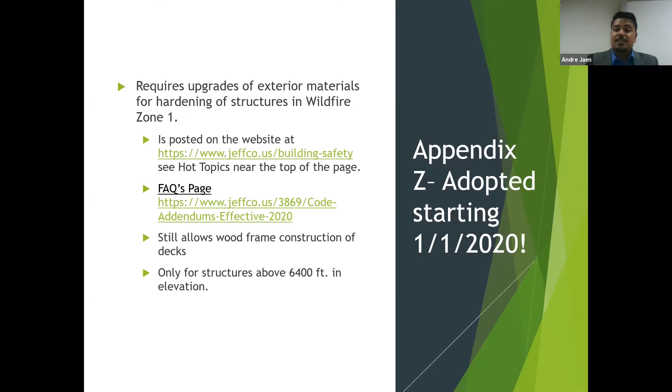The biggest question about this is the applicability zone, and it starts at 6,400 feet in elevation. The best idea, if you're working here in the city, is if it's west of C470, it's worth giving us a call. That's a good dividing line for a lot of the county there.

We also have a map posted on our GIS software specific to this, so you can see the wildfire zones. Basically that contour line is a good indication that you're going to hit that 6,400 mark, which triggers these requirements to meet the Appendix Z standard.

This includes all buildings, all construction, including moved buildings, which is probably one of the trickiest things here. Bringing something into that section of the county, or a modular home, those might be a little more scrutinized as we move forward—this is brand new to us too. If you have specific questions about that, I'd be really interested to hear what you've run into.

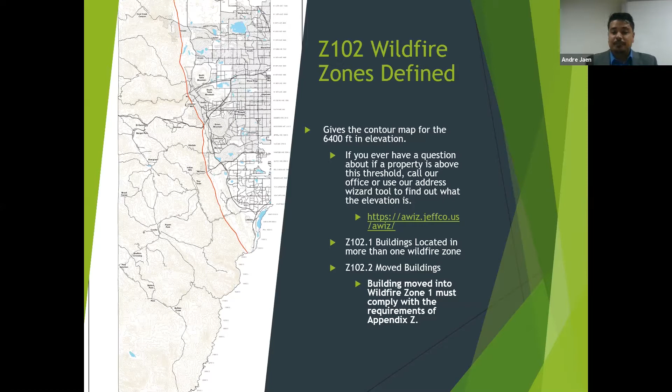So what does it all mean? Well, it means everything. Residential and commercial, that's what we're talking about. We're talking about move and sets. And probably the most common question that we get from home builders and from homeowners is, can I still build a deck with wood?

And the answer to that, we worked really hard to make sure is a yes.

We worked in writing this with a few different places. Our fire district was the folks that started this off.

All of our mountain fire districts are seeing increases in terms of population density up in the foothills. They're seeing more and more foam plastics and composite materials that concern them. And obviously, because of climate change, they're seeing a much longer fire season. So that's what's really sparking their initiative to come to the building departments and say, what do we have to do in order to make this better?

From there, we also had some discussions with Boulder County, who has historically been doing WUI-based codes for some time, to see kind of what's available in the market, how their builders reacted to it. Because for us, we didn't want to put our local builders in a position where they required materials that weren't readily available or did the kind of things that would increase costs so dramatically that they would not really have a chance to make a buck.

Because at the end of the day, if they can't make a buck building a house, then they don't build a house. And that's way more important.

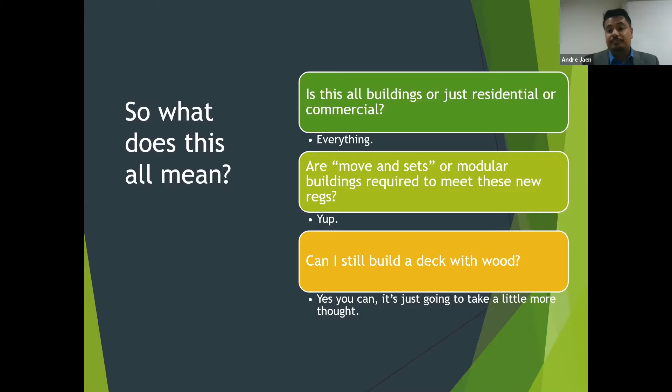So if you crack into this code, what you're going to end up seeing is a couple of different sections based on fire resistance rated construction, which we're all really familiar with out of our building codes, but then also non-combustibility. The important thing to think about here, from a top-down perspective, is that the building code does a great job in isolating fires in compartments. We know how to separate hot gases from other fire compartments or fire separation areas. This is thinking about it from the outside in, and so that works a little bit differently.

So in terms of isolating what materials you're allowed to use for things like exterior cladding, we talk about fire resistance rated construction in terms of assembly, right? That's the entire wall section. That's the sheathing, whatever you might use as a substrate if you need to upgrade depending on what sort of siding or soffitting you're using. There's a litany of different materials that you can use, but the important thing when submitting your documents or having this conversation is that we're going to talk to you in terms of system. How does this make that 1 hour fire rating? And from the fire side being on the exterior, how do we think about that?

Integrity throughout the assembly is obviously the biggest concern, making sure windows, doors, all of that meets that same criteria. But ultimately, this is something that most builders are really familiar with, and they're excellent at being able to move these kind of questions forward with their design professionals and team up together in order to move forward.

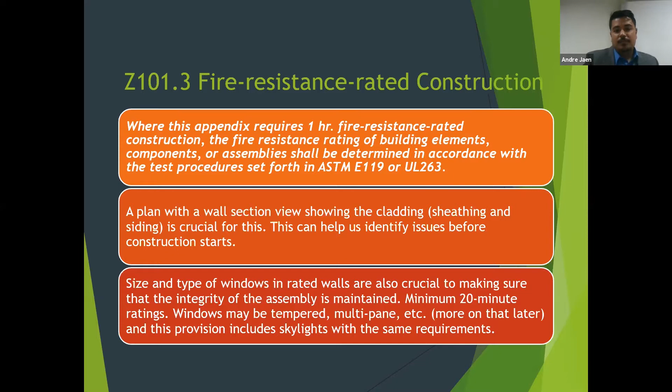Non-combustibility, obviously everyone's familiar with, but what does that mean from the outside? Well, it means that materials like metal, while they won't burn, they transduce heat very well. And when we think about fires, when we think about wildfires, we have to consider what that's going to do to those internal materials. Oftentimes it's required adding things like substrates.

So on a metal roof, you would add DensDeck or attach it to a non-combustible framing member in order to meet these sorts of criteria. Ultimately, though, as you think about moving forward with other attachments, you want to keep that in mind. How do these things differ from each other?

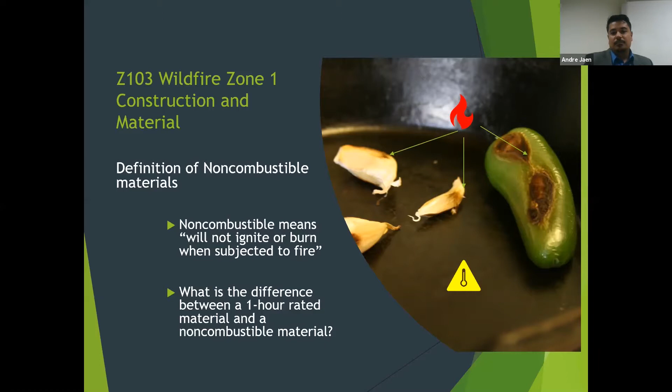So in ignition resistant building materials, we require that whatever materials we're talking about typically meets the ASTM E84 test. That's the extended burn time test right there. You'll see on there that there's also a mention about weatherability.

This has brought up some concerns from builders about things like, what about spray on intumescence? Or what about spray on fire resistant materials? How do we stand with those? Typically, the biggest concern with that is maintenance and weathering. A lot of those materials used on the exterior get a little cloudy about how we're going to make sure that those are protected consistently.

So in taking a look at what materials you're going to use, obviously feel free to give us a call. We'll get you in touch with the plans examiner that will go through your material list line by line. But in terms of shopping, you're looking for that ASTM E84 test, which is going to be abundantly labeled there. So anything at the job site, that's what your inspector is going to be looking for, and any discussions on what materials you're allowed to use, that's a typical thing that's going to come up.

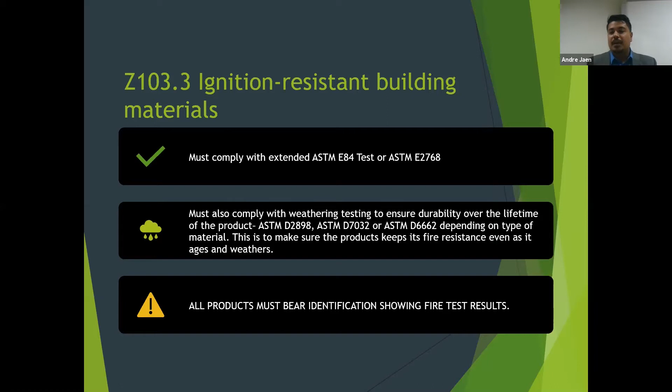So if you're unfamiliar with those two tests, it'd be worth a look as to just kind of how they apply and what things you'd be looking for with them.

So moving through the building, we'll start at the roof. We've been doing Class A roof ratings up there for years, so this is nothing new. Typically that's something the homeowner will take on themselves, or it'll be a really simple, streamlined permit. Class A roof assemblies have been required in Jeffco for a long time. Typically the stuff we have to worry about is your flat roof materials and metal roofing systems, but that's really nothing new.

Now, in terms of addressing the continuity of that, for asphalt roof shingles, we've allowed for cut close valleys, California valleys, a woven valley, or a W metal valley with 90-pound felt underneath. Any of those are valid options for your roofing assembly, and we see them as just as continuous in terms of coverage for the full Class A.

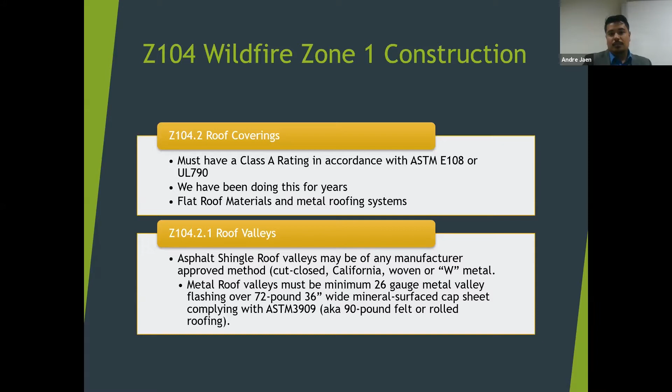Now, as you move through your exterior walls, this is typically where we start to get tricky. When we talk about the exterior wall, we're talking about that 1 hour fire resistant rated construction. We've seen assemblies now where we've maybe had wood shiplap with 5/8 type X behind it - things that have been considered opening protectives that we would typically do on a 1 hour wall, and we're just using that to help meet this criteria.

What that means in terms of your fire district, though - when we invited them to a few of our contractor meetings to discuss this with the builders - is that they don't know there is gypsum board behind that wood siding. And sometimes that's going to mean they have concerns about trying to set a fire line there because they don't know whether or not that house is defensible.

So while this is a discussion you obviously have to have with us because we have this code, I strongly encourage every builder to get in touch with your fire districts about their expectations, about their concerns. That hands-on approach will really help guide your project in the right direction, and make sure your homeowner is getting the product they really want.

Your approved non-combustible materials - we run into a lot of hardy board siding. Cementitious siding, cementitious fascia, all those are going to meet this kind of criteria. Heavy timber and log wall siding, that's all going to meet it as well. Fire retardant treated wood, obviously we want to see the ratings for that.

And then our ignition resistant materials, and we're back to that definition from earlier. Remember, those are going to transduce different heat depending on the framing member that they're attaching to. We need to be cognizant of the whole assembly that we're using - we want to make sure that's extending from your sole plate all the way up to the underside of the roof sheathing.

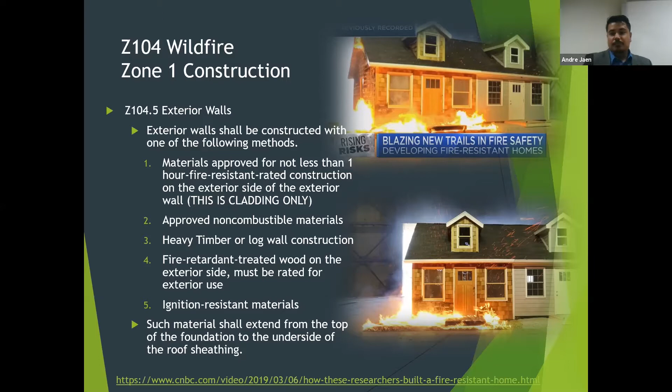So at the eaves, basically we're at the same sort of level of protection as the exterior wall. Now, you can take a look at a few different manuals that are out there. The Colorado State Forest Service has a great Firewise manual you can take a look at, where they show, in terms of wildfire spread, how hot air rises, gets trapped under the eaves, and starts to become a concern as a wildfire progresses.

What we're looking for there is basically the same level of material as your exterior cladding. From that, it's important to note that a lot of materials out there have been evaluated by the California Fire Marshal Service. They have a building material listing service site that is an invaluable resource for this sort of thing.

So if you see some product here that doesn't fit any of these descriptions, that doesn't mean that it's disallowed - it still could be usable. We just need to scrutinize it a little further, take a look at that listing service, see if we have some evidence in order to say, absolutely, we can take this on.

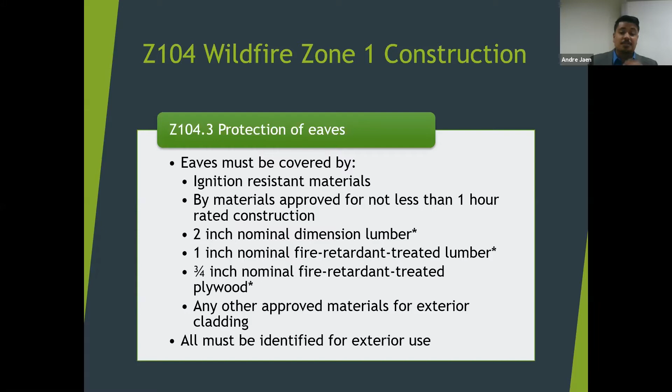So moving on to gutters and downspouts, they do have to be protected now. It was one thing that we had never required previously. Typically, on most inspections we do, we don't see gutters installed. We understand that's just the nature of the business and scheduling people out, and it's only gotten worse since COVID. Getting subs lined up in order has definitely extended timelines. There's no getting around it.

That being said, where we do come out and see gutters provided, we want to see a gutter guard. Other jurisdictions we've seen have requirements for non-combustibility, wanting a metal guard on there. At this point, we have not written that expressly into this code. We want to see a gutter guard installed because that's a step in the right direction for now, but we're making these changes incrementally.

We do realize in trying to write this code, whatever we put in is not going to solve the problem of existing building stock with failing wood siding and wood shake overnight. Those are all still going to be there. So to scrutinize the next house being built so much that it raises the cost of construction enormously, when the neighbor next door isn't taking care of that property and is propagating wildfire spread, that's still kind of hit and miss there.

So just to keep you informed, as of right now, a gutter guard is what's required of you, and certainly have that discussion with the homeowner if they want an upgrade or something like that. But that's where we stand at the moment.

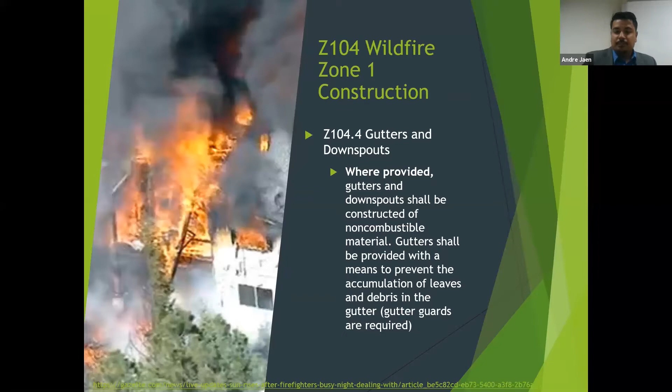Now, decks are probably the biggest question, especially for folks that live out in the hills, because building a deck is just as tantamount as building the house. It's exactly why you want it - the view.

Your deck surface needs to be of a non-combustible material and approved wood thermoplastic composite lumber with an ASTM E84 flame spread no greater than 200. That really does include just about any type of composite decking that we've run into that you can typically find.

During our initial evaluations on how we were going to move forward with this, we brought in some contacts from our HBA. We also spoke to some distributors in town about what they have and whether their stock would meet this. Specifically, Moore's Lumber had a few representatives at our contractors meetings regularly. From what I garnered from them, this really seemed like a non-issue in terms of supply. But as always, definitely scrutinize any materials that you're getting just so you meet this criteria. And if you have any questions about something you're not sure on, feel free to reach out.

Other ignition resistant materials - IPE decking, some other exotic hardwoods - definitely meet that criteria for low enough flame spread that they can just be used without issue. So you do have a lot of options out there.

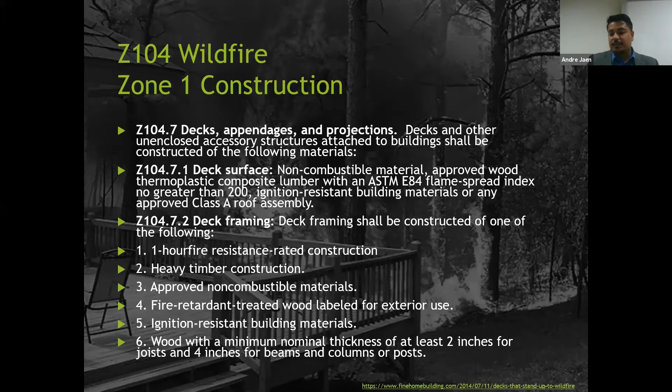Exterior windows and exterior glazing - at this point, conversations about this topic typically include things like metal frame windows. After discussions with our fire districts, they didn't have as much concern there as with the number of panes in the window or getting tempered glass in there. So we allow for multi-pane, we allow for tempered, we allow for decorative glass block. There's very little restriction on this in terms of windows.

The only times we've seen issues with this has been more oriented towards homeowners wanting to use reused materials for smaller projects - things like single pane windows going into an unheated garage that might otherwise be a viable option, but in this case we're not going to allow.

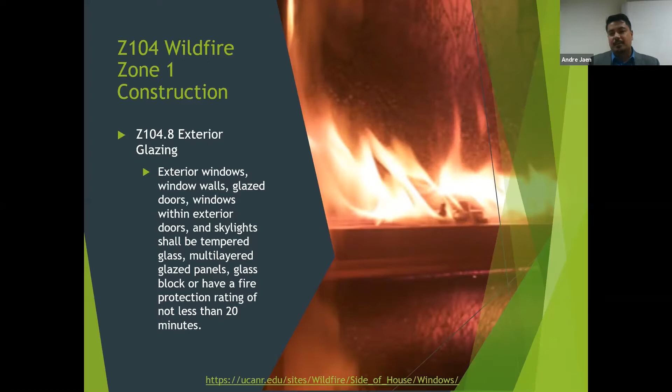Exterior doors - you still have basically the gamut: solid core wood doors, metal clad, 20-minute rated doors, and obviously all glazing in doors has met the criteria for typically tempered glass for just about ever now. It's typically not much of a concern to make sure you're getting a door with that. We really haven't run into a circumstance where we've had to correct this out in the field. Once again, it's typically materials getting reused from other projects and smaller things where this is a concern.

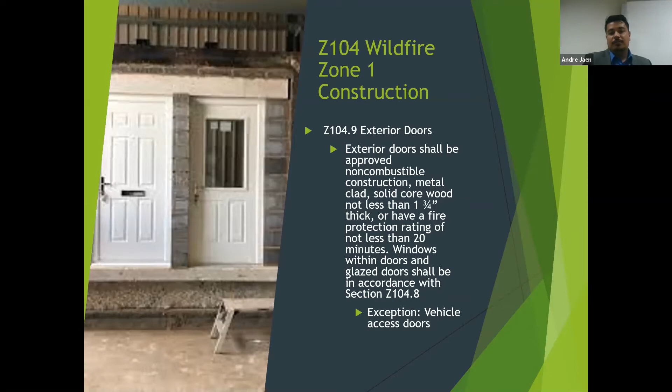Ventilation - the next big question here is how you're going to make sure you're meeting this really important standard for being able to vent that roof while maybe eliminating some soffit venting. Vents located in the fascia, according to data from people with more expertise than I on how wildfires work, shows that by being pushed away from the house and not underneath the soffit, there's less chance of intake from an ember.

We've also had questions about things like, well, what about your ridge vent? Typically those are made out of plastics, very permeable. From our conversations with fire districts, exhaust vents are less of a concern for them overall - that ridge vent isn't likely to intake an ember. Certainly it could be an entrance point, but it's that intake vent lower in the soffit that's going to convect and pull that air in. That's really where you're going to possibly get some intrusion, so that's their biggest concern.

Moving forward with this, we wrote in that you'd have 1/8 inch screening, meaning you can create your vent a few different ways. There's a lot of materials already out there that will meet about an 1/8 inch opening, or you can add screening to them, just realizing you're going to take a small reduction in the air value, the airflow coming from that particular vent.

You can also make your own - we've seen that done by punching some holes through your blocking on an open tail rafter system, then making sure screening is placed on the backside of that blocking so nothing too big in terms of ember size gets in there. We mentioned gable and dormer vents, though it's atypical in terms of construction these days to see that type. Foundation vents should be located as close to grade as possible, just to mitigate the chance of airflow trying to suck embers into an open crawl space or basement.

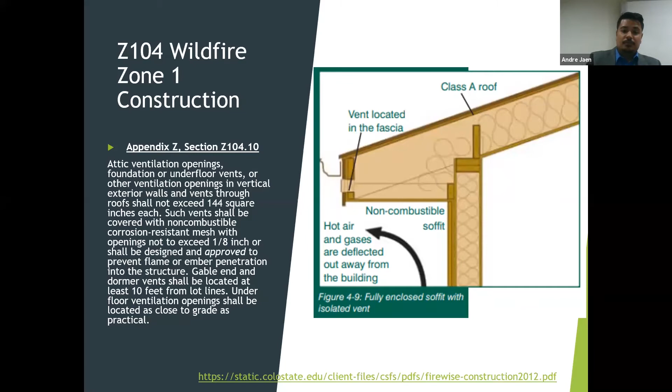Roof replacement - another important point here. Typically for smaller projects, anything that didn't have a Class A rating before, especially, we're going to force the issue of replacing the full roof if you do a 25% repair. Previously what we allowed was anything more than 2 squares would require a building permit, but we would allow any type of roof replacement - so if you only wanted to do 2 slopes on a roof, you could. In this area we're going to try and catch up some of that existing building stock, especially with these old existing cedar shakes.

Those are the kind of kindling that really spread wildfire quickly, so we're going to try and tackle that issue first. So if you go back and want to, say, do a half roof replacement, there's a good chance we might be talking about a full replacement. We do have a list of materials that don't fit this criteria as exceptions - things like concrete and clay tile, simply because of the vast expense that could come from requiring a full replacement due to a repair. We are going to allow you to do partial replacements on those - so we'd issue a permit for, say, a 50% replacement.

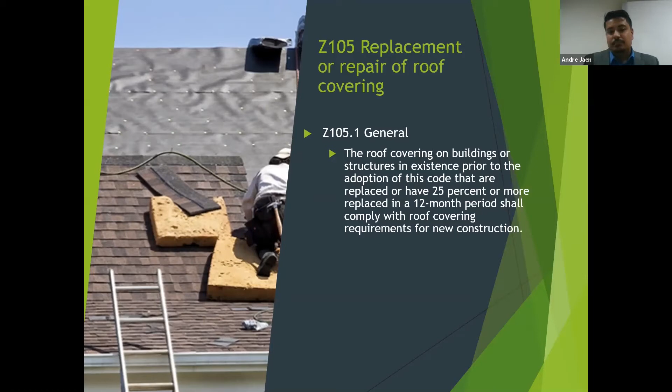Now, right here is Holy Grail when it comes to what we're talking about. It's that CAL FIRE Building Materials Listing Service. I can't stress enough how important it is to spend a little time getting familiarized with how to search the site properly and get what you want out of it.

What will happen is when you select a particular topic, say decking or exterior or under eaves, you'll find a list of materials there that at first glance you'll see mostly the product name, the manufacturer, but that's about it. You won't see specifics on it. If you download the PDF that comes off of that page, though, you will see the installation specifics for how they're going about meeting this rating, so that way you can make sure that you're meeting that criteria.

Some of these things will tell you wood shiplap siding when you first take a look at it. Then as you scrutinize a little further, you'll find that it's only for 5/4, and that material might not be readily available for you. That's the kind of thing that you might want to bring up with your distributor. You also might want to just check to make sure that any materials that you aren't specifically bidding but you know are going to end up on the job are definitely going to still meet this criteria too.

Overall, we see a lot of success once people start using this regularly to their advantage, but it just takes a little time to get used to. It's not too bad of a website, but I can't encourage you enough. Spend some time getting to know it.

And if you see something that either isn't there and you think should be, feel free to give us a call. We're happy to get in touch with some manufacturers. I had a call from LP just this week about some of their products and making sure that we're kind of advertising this on their behalf to say that, hey, there are options to go and figure out whether or not this meets your criteria without calling your sales rep immediately. You got a few different options to look this up for yourself and see if this works.

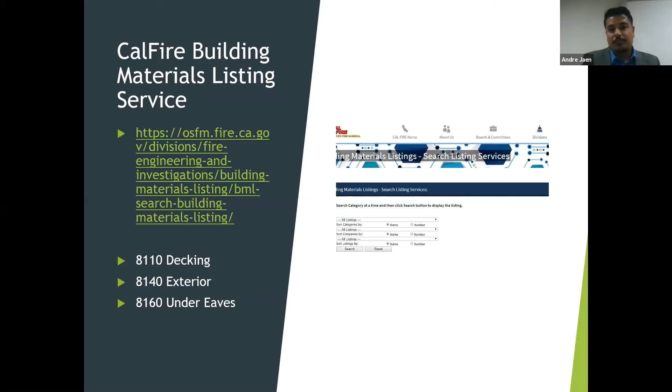So this is an example of one of those reports that you would consider pulling down. If you don't have a report for your material that you'd like to use, then we can still scrutinize it further with you. We'll take a look at the flame spread, the smoke spread, whatever information we can get from some good reputable sources, typically like an ICC-ES report, things like that.

So I can't stress enough that we are cognizant that while this is a major change, a lot of you guys have already been building well above the standard. In scrutinizing some of these products, it's important for us to recognize that there are options and there's room for creativity on how we're going to meet this criteria.

So if there is anything that you have a question about, feel free to give us a call. We'll get in touch with the manufacturer with you. We'll do a conference call. We'll figure out what we can and can't do with it.

So plan review expectation, right? This is kind of one of those big hurdles. If we can save you on the design side and on the bid by making it clear that these things are what's required, then obviously you're advantaged compared to your competition out there.

Please make sure that if you can, just like you would on any other general notes page, take a few minutes to have your design professional come up with a list of exactly these same criteria so we can quickly reference these for you. If we see something that's a red flag immediately, we can tell you. It'll save you redesigning later.

We do have, and I'll flip quickly to this next page, we do have a sort of cheat sheet available here in the office. So if you send a small project down, we can kind of walk you through that same thing, or you can use it as a template.

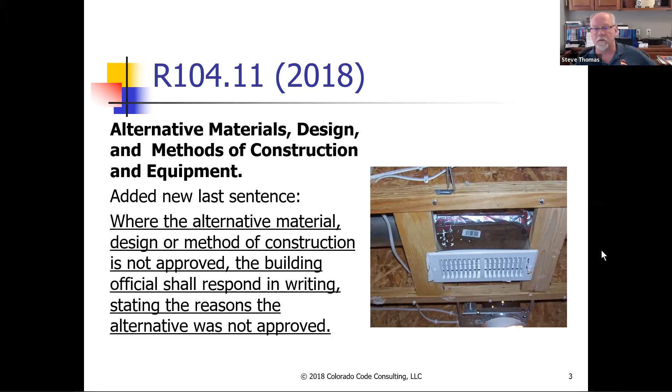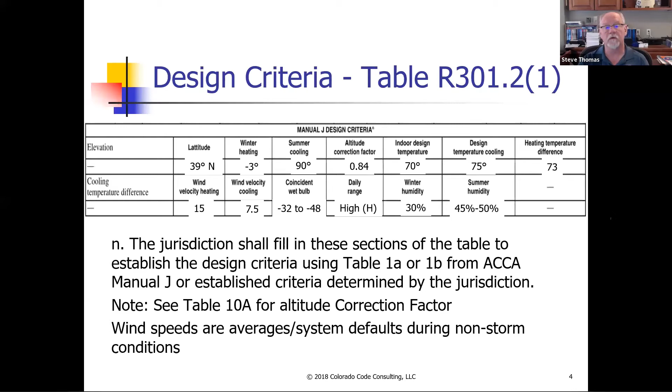For those of you that do townhouses, to be honest, the 2015 IRC was terrible. There was a major change between the 2012 and 2015 codes—it used to say townhouses had to be built as separate structures, so you ended up doing either two one-hour walls or the common two-hour wall typical in a townhouse. They took that language out because some jurisdictions were saying that's an exterior wall, so now it has to be a brace wall line and provide bracing in that wall, where maybe you could do two townhouses and do a perpendicular brace wall line there. So they took that out to get rid of that whole concept.

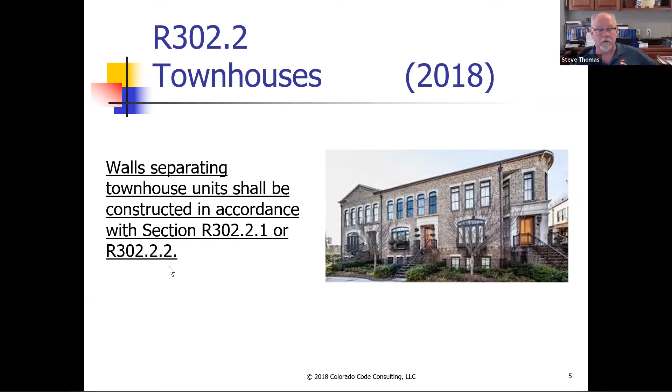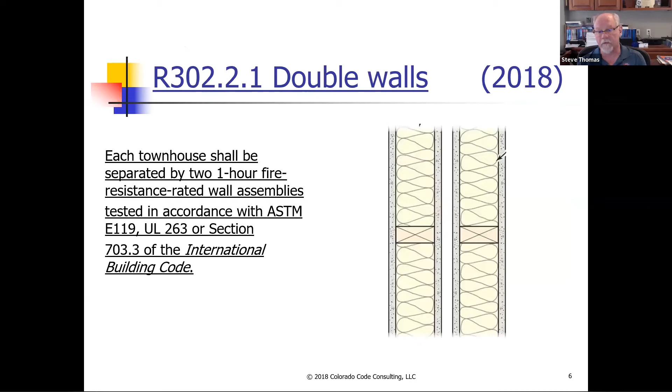But when they did that, they just went to the common wall, which from a pure technical standpoint, the 15 would have said you can just do a 2-hour wall. You couldn't do 2 one-hour walls. So in 2018, we've changed that language to say the separation of townhouses has to be done in accordance with one of 2 sections, 302.2.1 or 2.2. So what you've been doing probably isn't going to change at all. But now you have a specific option of providing 2 one-hour wall assemblies. But most commonly here in Colorado, most of us are just doing common walls with a 2-hour shaft wall in the center, and then framed walls on each side.

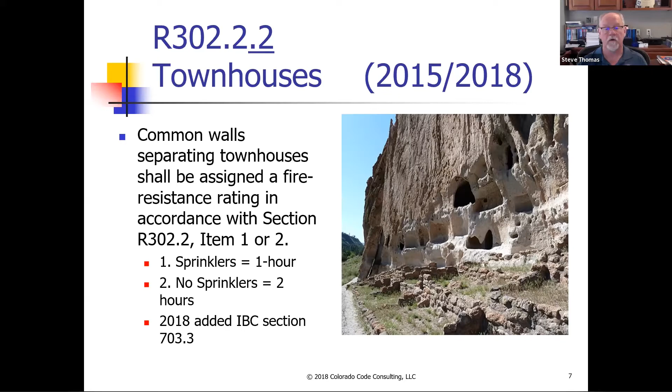So if the building's not provided with fire sprinklers, it's a 2-hour separation. If you have sprinklers, that can go down to a 1-hour separation. Some of the continuity requirements changed a little bit, but like I said, I don't think you're going to build your townhouses any differently than you have in the past. Most everybody in this area is doing the 2-hour wall, so common wall in between. So there's your common wall between the 2.

This one's not going to be a very popular one, I don't think. It wasn't popular when it first came in, where we required protection of the underfloor assembly to protect firefighters from falling through. If you're not familiar with that change, I-joists and floor trusses burn out in about 7 or 8 minutes. They've done actual tests at UL to show that. And that's where this came from, because about 7 or 8 minutes into the fire is when firefighters show up to the home, and we've had several of them get hurt falling into basements. So the language to protect the underside of the floor with chipboard was added in 12 or 15. I think it was 12 for sure.

They've added some language to exception 2 that says, it used to say that if you had a floor assembly over a crawl space not intended for storage, or if you had fuel-fired equipment down there, you had to protect the floor, or you didn't have to protect the floor. Now it's added electric-powered heating appliance. So if you have an electric water heater or electric furnace down in the crawl space, you're back to providing that protection on the bottom side of the floor, or some of the other alternates out there to protect the I-joists and trusses. I don't think this is going to be a real popular change with folks since they added the electric appliances down there.

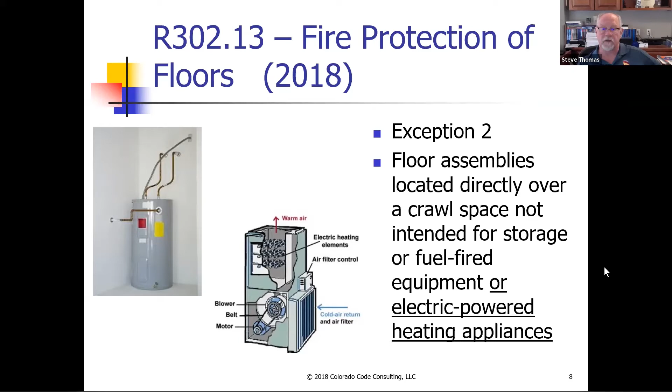We've had some problems with glass balusters and glass guardrails. So we've added language that says you have to have a top rail or handrail, must be supported by not less than 3 glass baluster panels or otherwise supported to remain in place, so that if one panel drops out, they all don't drop out. This particular picture would be in compliance - each one is held in place by itself, and it's got a rail over the top. The exception says you don't need that top rail if you use laminated glass with 2 or more glass plies of equal thickness. Apparently we're having some problems with people falling through some of these glass balusters that we've seen going into homes. So inspectors are going to start looking for that railing at the top, not just the glass being the top of the guardrail.

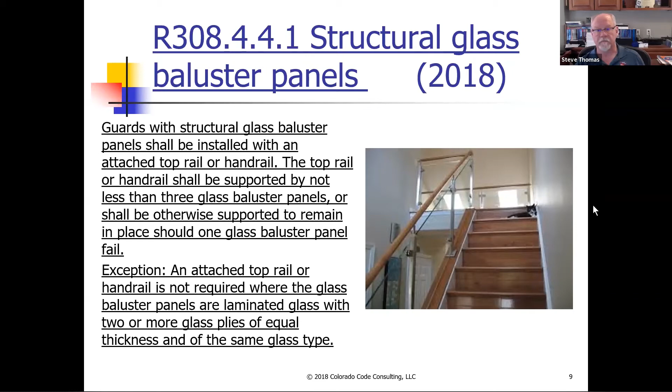This is one of my favorite section changes. If you remember right, in probably the 2012, the maximum rise of a stair in a home was 144 inches. In the 2015, we changed it to 147 inches, or 12'3". The reason we did that was because people said you can't get an even number of risers at 7 3/4 into 144 inches. So if we do an even number of risers at 7 3/4, we get 147 inches. So we went, okay, you can go to 147 inches. Well, nobody was happy with that. So what they did is they said newer homes, especially our higher end homes, are now going in with 10-foot ceiling heights. So if you take the 10-foot ceiling height and the depth of the truss and the floor sheathing, all those kind of things, they said we need to increase the height to 151 inches.

So it's like, okay, are we going to keep changing this every code cycle? I don't know. For me, it's a little frustrating, primarily because, to be honest with you, I'm the one that put the 12-foot maximum in the code in the first place, because at one point the IRC had no limitation on the maximum dimension between landings. So we'll see what happens with this one. It's kind of like, come on guys, we got to decide what we're going to do. This doesn't look good.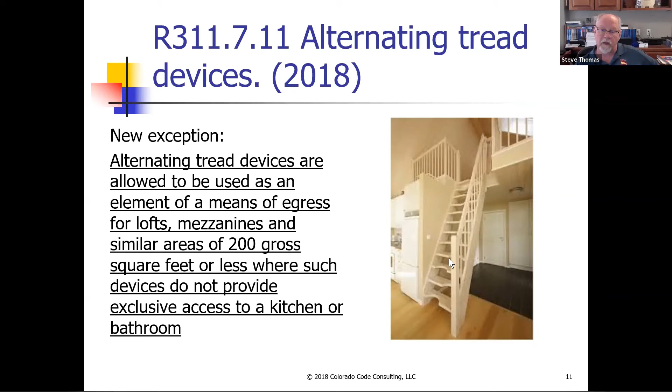So we added alternating tread devices as well as ship ladders to the 2015 code. However, you could not use them as a means of egress off of an upper level. So we have new exceptions for both the ship ladder and the alternating tread device: if you have a loft or mezzanine area up there that's 200 square feet or less, and it doesn't provide exclusive access to a kitchen or bathroom, then you can have that ship's ladder or alternating tread device serve as the egress off of that loft.

I, in some ways, like this. Some people would argue that's not the safest way to get down, but my experience is I've had people building homes who want this little sleeping loft up there, and we come do a final inspection. They've got a beautiful ship's ladder going up there, and we have to tell them, nope, you've got to take that down because it's not an approved stair.

And we know that as soon as we leave, they take it out. As soon as we leave, the ship's ladder goes back in. So I think this was something to address what people are wanting to do in their homes. There are specifications as to how to build the alternating tread devices and ship's ladder - riser height, width, handrails, the whole bit. So we'll see what happens.

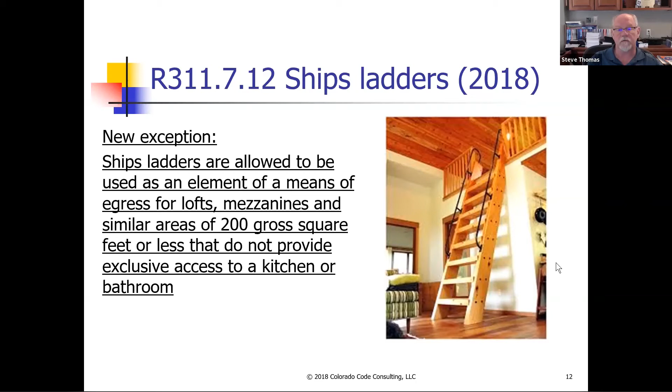Now, you can go ahead and rewire things if you want, but this is intended to address the new wireless smoke alarm systems you see. I have a wireless system in our house, one of the Nest systems. I really like it because if the fire alarm goes off, I get a notice on my cell phone. So I could be out of town and see the notice and call my wife to check if she's okay. So this is going to be a different requirement for a lot of people, because now you can't just put in a normal battery-operated smoke alarm if you're doing a remodel. You can do battery-operated, but now they've got to be wireless ones that communicate with the other alarms. So we'll see what happens with that.

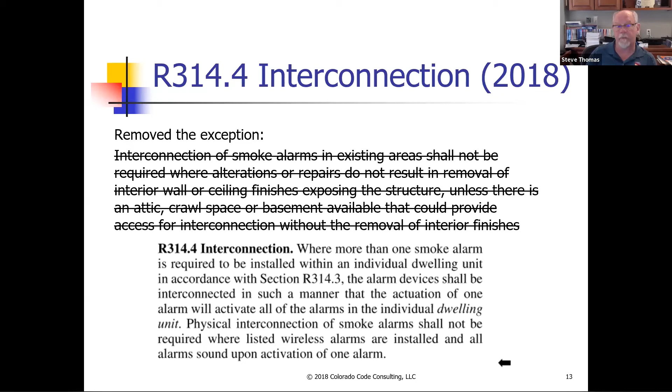On the other hand, for CO alarms, we still have the exception that says if you don't have to remove interior walls and ceiling finishes, then you don't have to interconnect the CO alarms. So if people ask, well, how did that happen?

Well, you have two different code changes and people didn't pay attention to the two. In the 2015 code, there wasn't any language about interconnecting the CO alarms. So somebody said we need to make sure those are tied together, and when one goes off, they all go off. And then when this came out, we went, okay, so I fully expect a code change for the 2021 code, and I have to go back and see what happened. But I would expect the change to basically delete that exception as well, because they have wireless CO alarms. I'm a big proponent of the combo alarms, so if you're doing remodeling, I think that's the way to go.

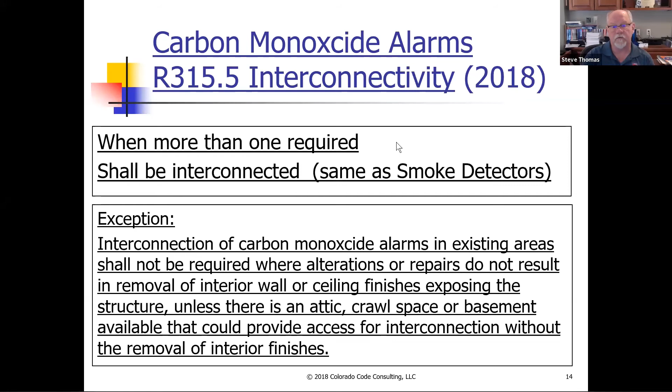By the way, just so you know, the 2021 codes are basically written. We've got a few more things to take care of, and they'll be published and available toward the end of the year. And we'll be starting to work on the 2024 codes. So those code changes will all start going through the process next year. It's hard to believe, but we don't even have a code out, and we're already getting ready to change it. So it should be a fun code change cycle.

So 324 was a new section that came in the 2015 code for solar energy systems. There's a whole bunch of stuff in there for both photovoltaic as well as BIPV, or building integrated systems. We've got a little bit about water type systems, hydronic type systems. The majority is PV, but you've got that.

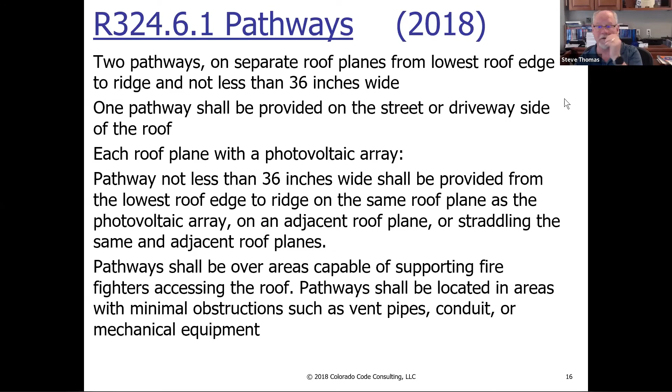So the big change here is pathways for fire department access to the roof. It now requires, basically - and I'll go to the diagram, it's probably easier to do - a 36-inch wide path up the side and along the top and along each valley. The whole purpose of this is so firefighters can get on the roof and do their operations for venting the fire and those kind of things. There is an exception: if a jurisdiction does not do rooftop operations, then we don't need the paths. But generally, you're going to need to make sure those paths get provided, so they can cut vent holes in the roof. This has been in the fire code for a couple of code cycles, and we finally got it into the residential code.

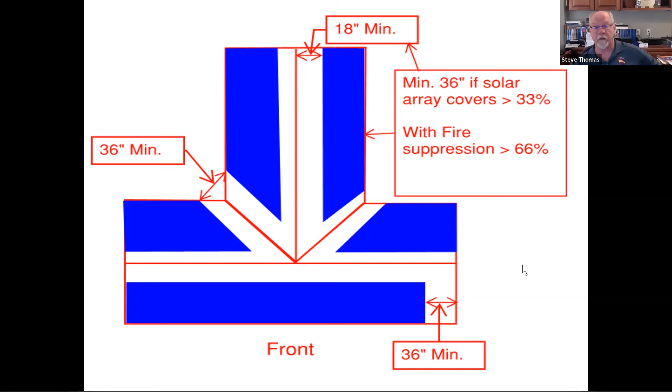The other part of this is that we can't have any solar panels near an emergency escape and rescue opening. Obvious reasons - these get to be very slick. We don't want people climbing on a PV panel and having a break and problems there. So anytime you've got an egress window up there, you've got to provide a 36-inch wide path from the egress window down to the bottom of the roof.

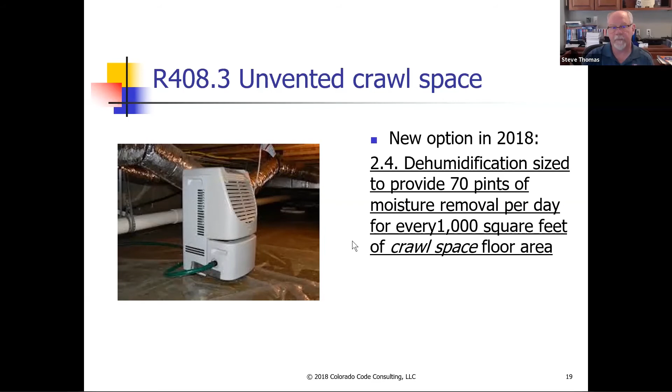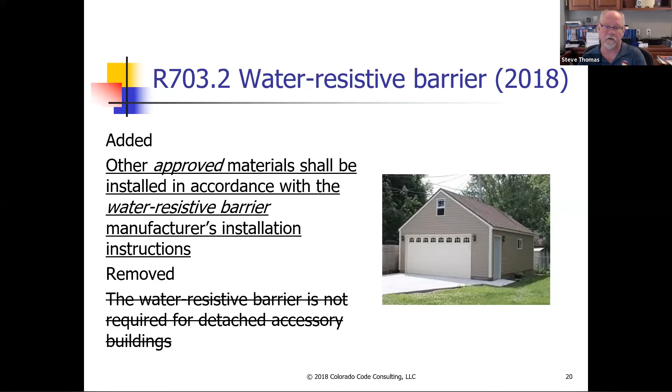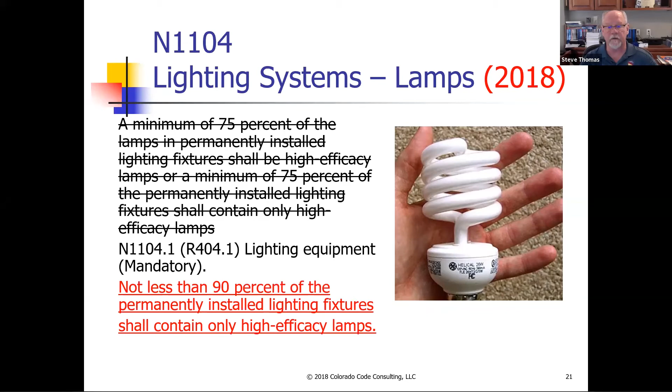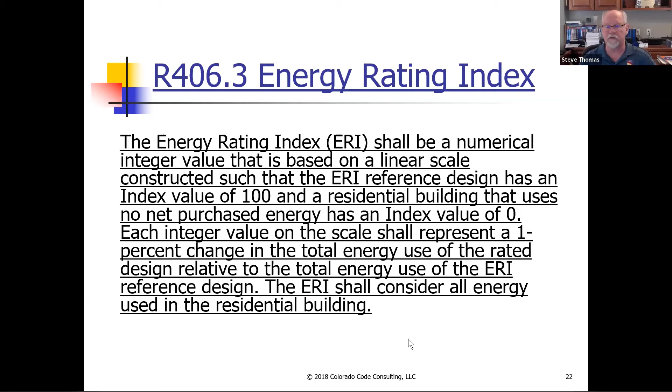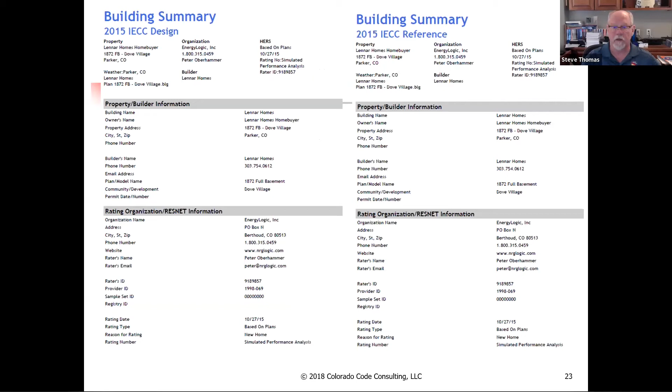Energy code real quick - the 75% of permanently installed high efficacy lamps has been changed to 90%. The 2021 code will go to 100%. So that's kind of been the pathway. We've got a new thing called the Energy Rating Index. Some of you may be familiar with this. It's a different way of doing performance energy for the building, and you'll see some different things going on as far as your energy raters and being able to do that. It gives you these targets depending on climate zone - we're in climate zone 5, so you're going to have an energy rating index of 61. So those of you using your energy raters and going that route will have another option to follow.

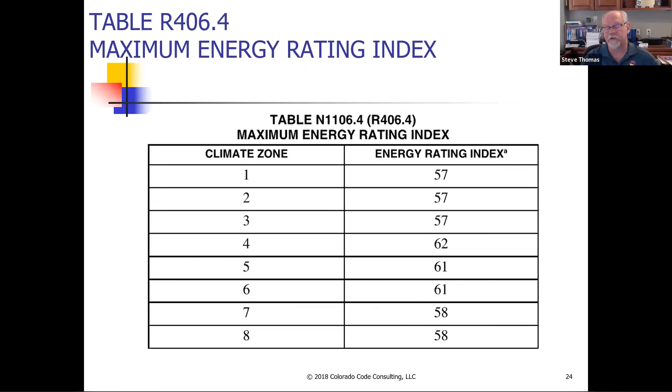Plumbing wise, I kind of like this one because it's always been a problem with these big self-standing tubs. The plumbing code said you had to have an overflow outlet, but now you don't have to. If it's not installed, that's fine, but if it is installed, it has to be 1.5 inches. For self-standing tubs, you don't have to have an overflow anymore, so that'll make it a lot easier on the higher end homes.

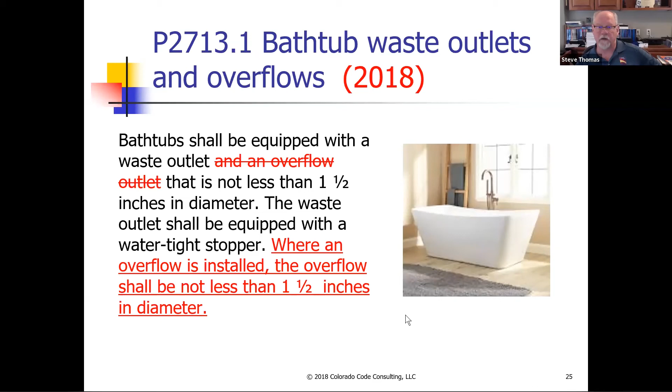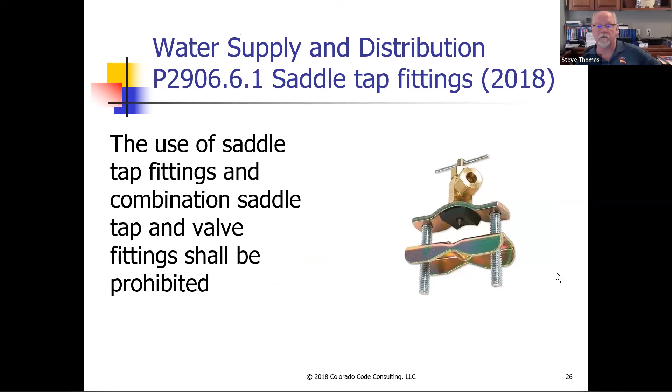This one's going to be interesting to see how it works. We can't use saddle tap fittings anymore, so your water line to the refrigerator, for example, will have to have a proper fitting. They won't be able to use that saddle tap. I wish I could tell you why they made that provision—I'm assuming they leak so much and don't really do what they're supposed to do. So we'll see how that works.